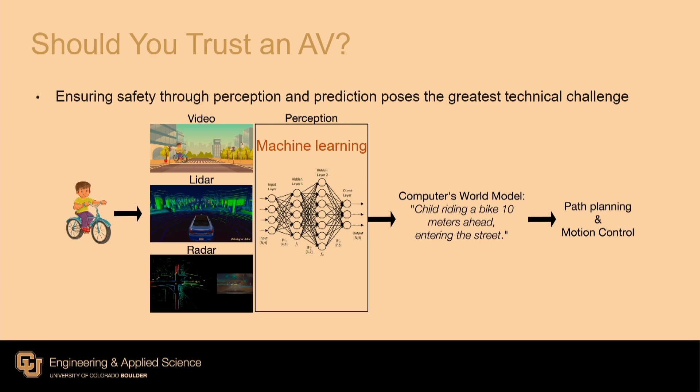My own research lies here, on path planning and motion control. And the good news is we can provide formal guarantees. We can provide a mathematical guarantee that the motion planning and the path planning is correct as long as the computer's model is correct. So that's the assumption, right?

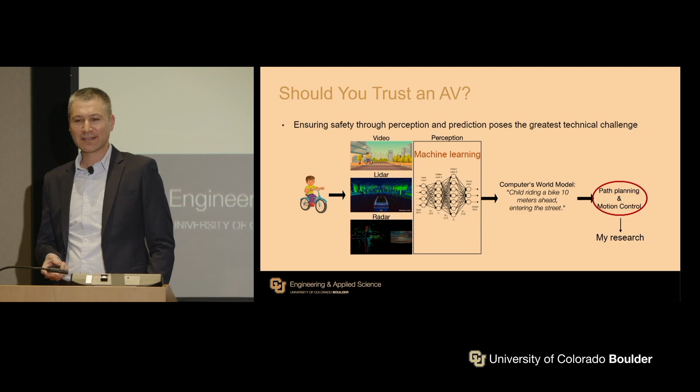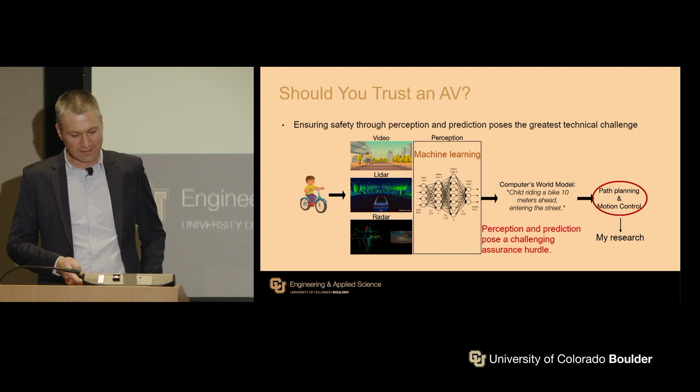So, what can go wrong? Unfortunately, this model is built completely based on seen data, the data that the car has observed so far, and this is the problem that we are facing. Let me dive into this more. Machine learning techniques do very well on patterns that they have encountered so far. They do great. But the problem is those scenarios that they have not encountered.

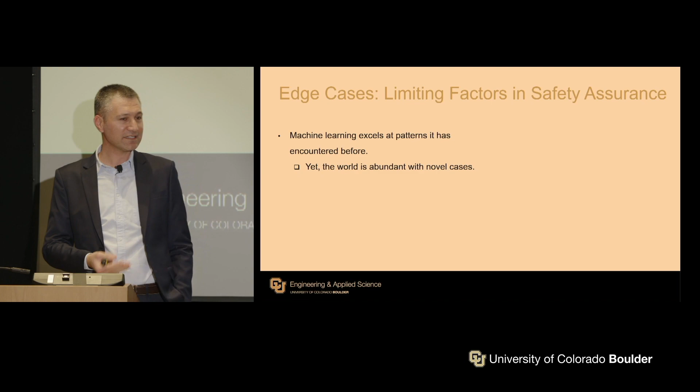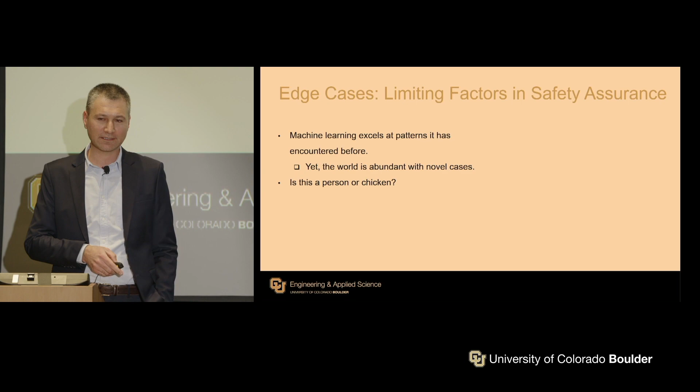And guess what? There is tons of novelty in the world. You go to different countries, you see things that you haven't seen in your life, right? And in fact, 10 years from now, you're going to see things which you never thought you'd see in your life. So let me ask this question. I put a picture here, and raise your hand if you think that picture represents a chicken. Raise your hand if you think it's a chicken.

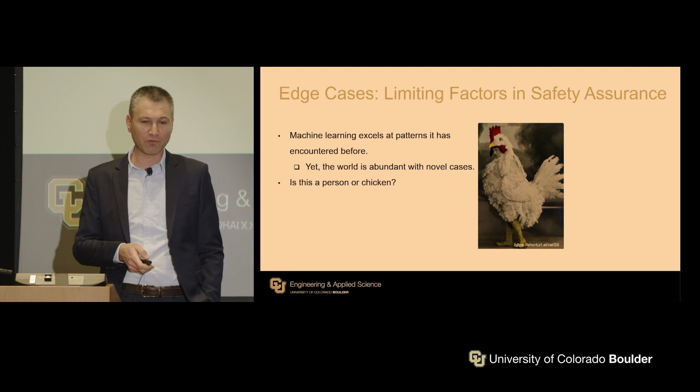Now let's put this picture into one of the state-of-the-art image processing algorithms, which is behind the perception engine in the autonomous vehicle, which is supposed to build the world around the vehicle. And the answer is 99% this is not a person. And this is the problem we are facing. This is the main reason we cannot deploy self-driving cars.

These are called edge cases, or corner cases. These are unforeseen surprises. They won't surface during testing, and this is the problem. Let's say your self-driving car is able to do well in 98% or even 99% of scenarios. Is that 1% really the bottleneck? And the answer is yes.

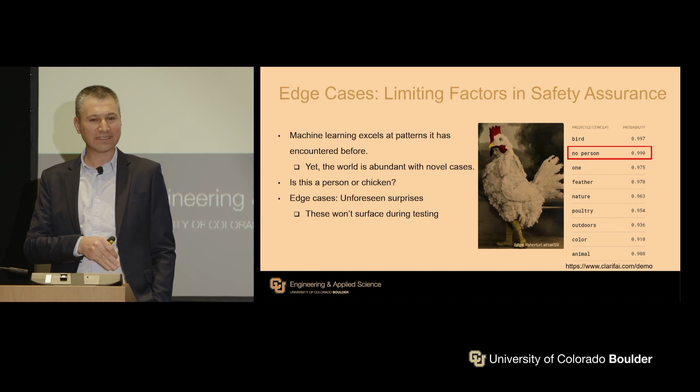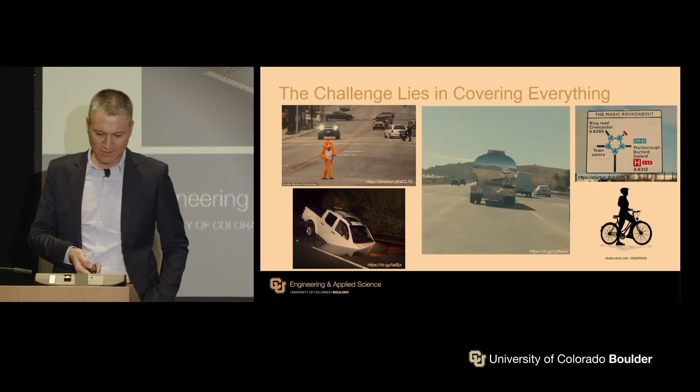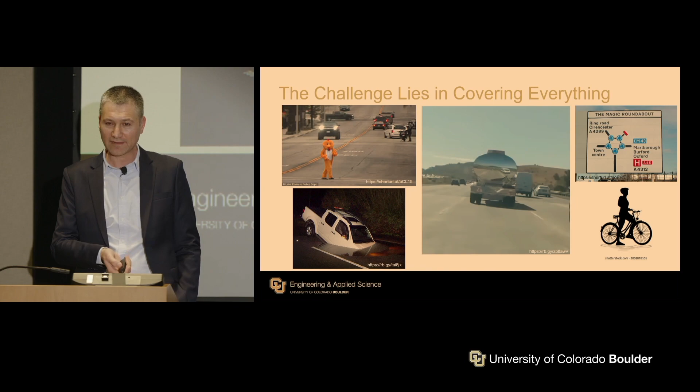Maybe as humans, we have some insight, right? Or here, as you can see, there is a reflection of another car in the truck which is driving in front of you. And also, your self-driving car should be able to navigate very complex traffic situations in different countries. Here you can see this magic roundabout, right?

And of course, it should be able to understand, for example, here there is a person. Is this person standing next to the bike, or is this person biking? And you might say, does this matter? Of course it matters. Why is that? Because if the person is biking, you have to predict the speed of the person, right?

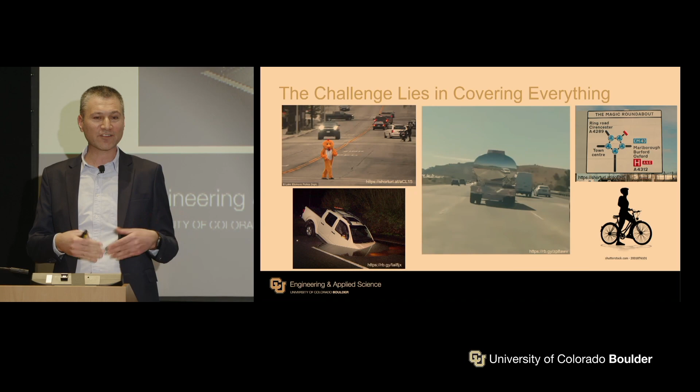If it's standing, then these are two totally different assumptions, and that's going to affect the deployment of the self-driving car and the navigation. So, okay, what is the current practice? Public road testing, right? If you go to San Francisco, you've seen a lot of them, right?

What are the pros? Of course, they're very efficient in identifying straightforward cases, right? And most of them have been driven under sunny skies: Arizona, Las Vegas, San Francisco, right? And you know why. So what is the con? First of all, they're very costly.

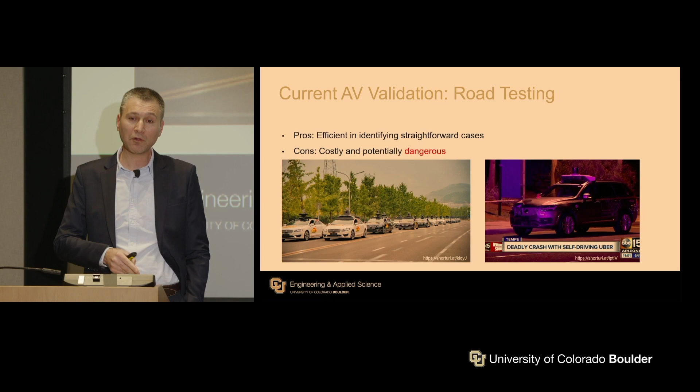This is a self-driving car company in China. They're actually trying to test on a designated lane, right? And at the same time, they can be dangerous. This is the Uber car crash that happened in Arizona in 2018. A pedestrian died. After this incident, Uber actually shut down the whole autonomy division. One incident, and they shut it down, right? Because it affected people's perception.

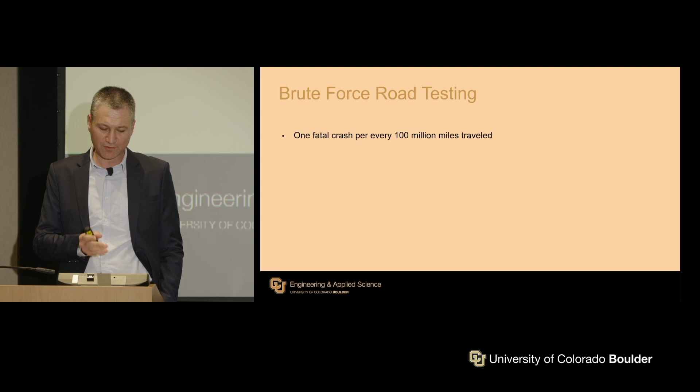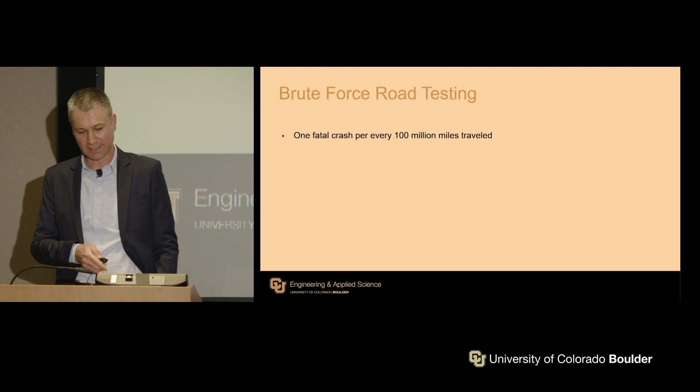And I'm going to tell you, brute force road testing doesn't work. The reason for that is, let's look at the statistics we have. We have one fatal crash for every 100 million miles in the US. That includes drunk drivers, right? One fatal crash in every 100 million miles. So let's say we want a better statistical guarantee, and we test at a rate of 3 to 10 times longer than this, one fatal crash per 100 million miles.

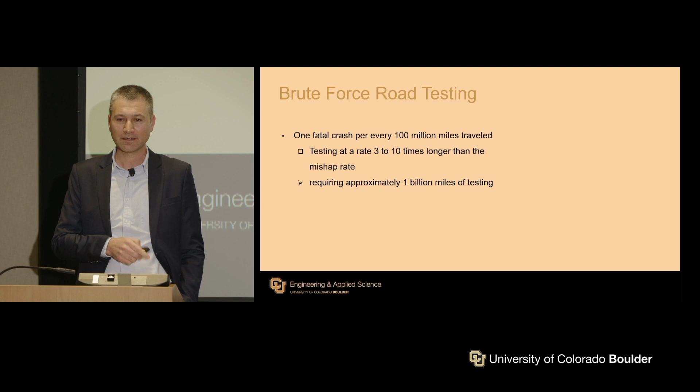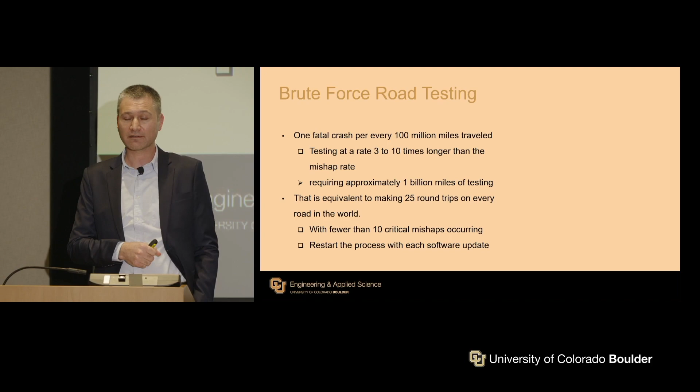That requires approximately 1 billion miles of testing, which means 25 round trips on every paved road in the world. That's the amount of testing you have to do. And you're only allowed to have at most 10 fatal crashes. This is not the end of the story.

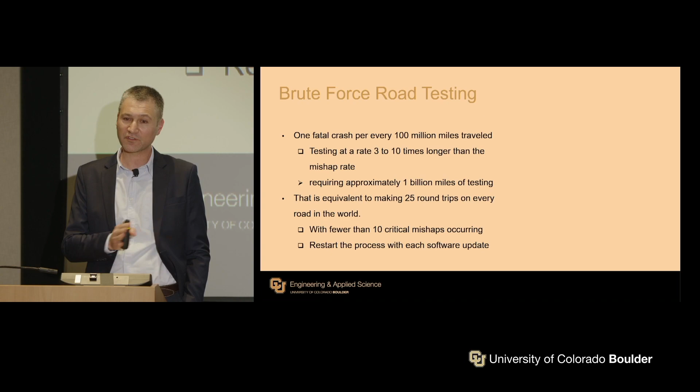Guess what? You update your software. You update the geometry of your car, a sedan becomes an SUV. You change the sensor camera. You have to repeat the test from scratch. The result of the previous test does not carry over if you make some changes in your system. So you see, brute force testing is not practical.

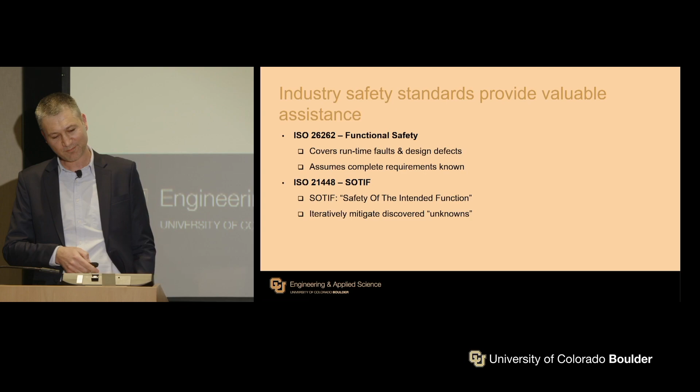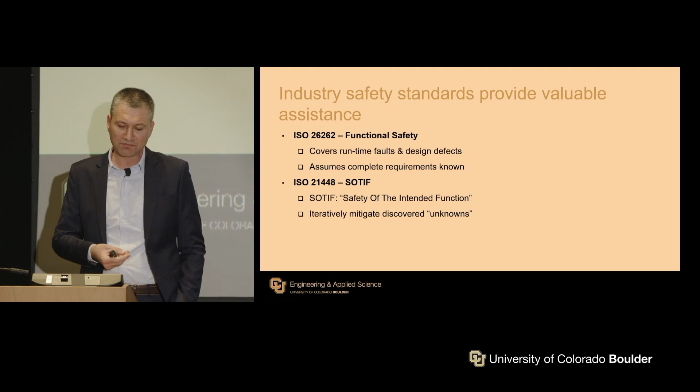The good news is the industry is actually working on some standards for autonomous vehicles. These are some of them on functional safety, which have existed for 10 years already. And there's a new one developed in the European Union called SOTIF, Safety of the Intended Functionality, which tries to iteratively mitigate discovered unknowns.

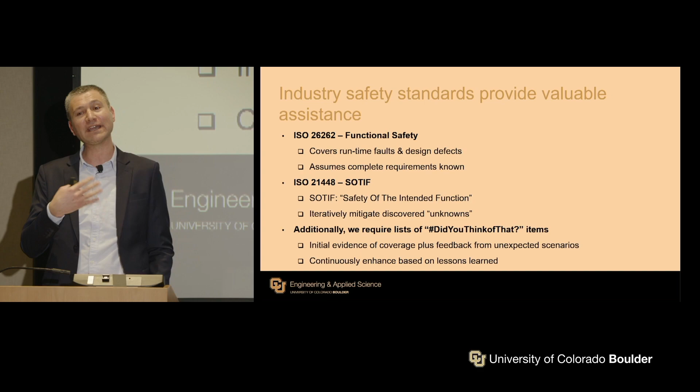Additionally, we also need to have a list of "did you think about that," right? These are the unknowns we have to think about, the corner cases, the edge cases, which might happen in reality that we have not thought about. So we need to continuously enhance based on lessons learned, and we need feedback from unexpected scenarios which might happen.

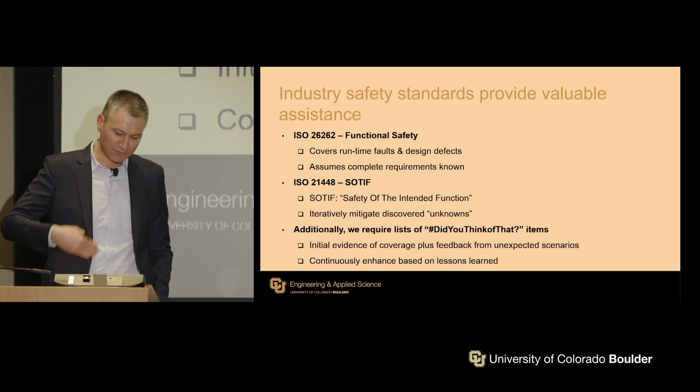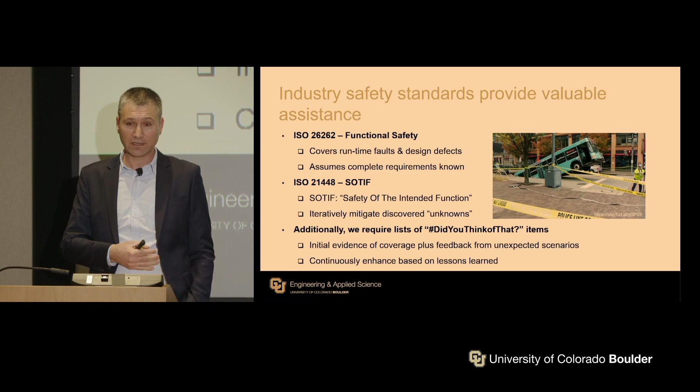And this actually happened in Pittsburgh, right? This is a bus. In this case, the driver decided in real time that the best option was to let the passengers out of the bus. Now imagine it was a self-driving bus.

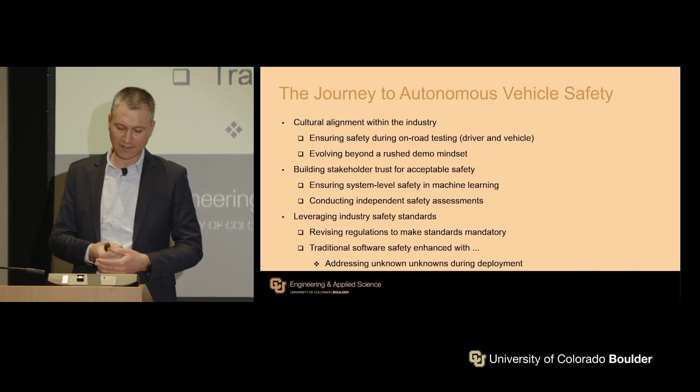Okay, what is the journey to autonomous vehicle safety? We need to change the culture within the industry. And we need to provide safety during on-road testing. For example, with the Uber crash, they shut down the whole division, right? If we cannot provide safety during testing, that is going to impact and delay the whole process for several years.

We need to evolve beyond a rush demo mentality, which is the case now in the US. The Europeans are a bit more conservative in mindset. They're taking their time, they're following the standards. But this demo mindset also makes sense, because they need to secure the next phase of funding, right? They need to deploy something.

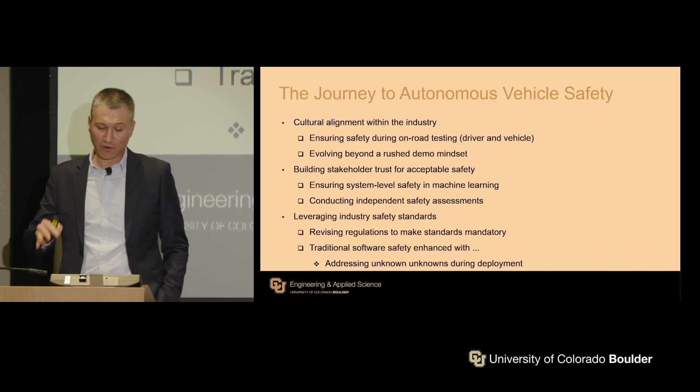We also need to build stakeholder trust for acceptable safety. As you recall, I said we are using machine learning techniques for perception, so we need system-level safety for that. And we need independent safety assessment for self-driving cars. Many industries do have independent safety assessment: the FAA, the petroleum industry, many industries. The car industry is one of the few which does not.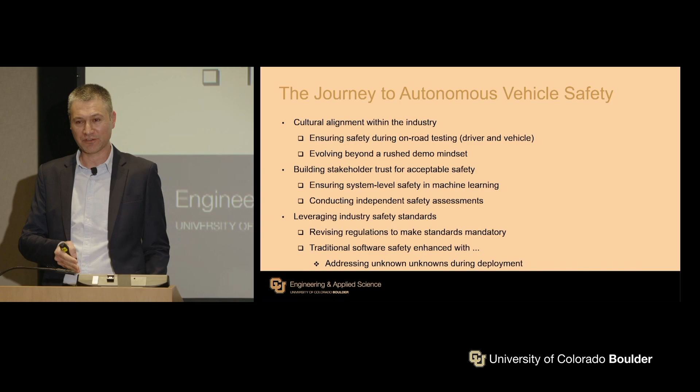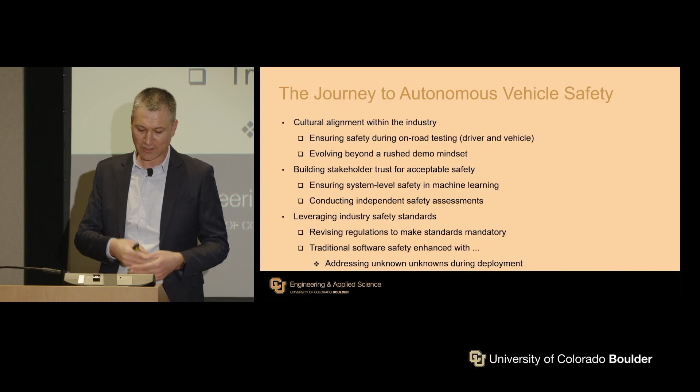We also need to leverage industry safety standards. We need to revise regulations and maybe make them mandatory, right? It's very strange to hear that many self-driving car companies in the US are fighting hard to not have any standards for autonomous vehicles. And of course, we need to employ traditional software safety, enhanced by addressing the unknown unknowns during deployment, those corner cases which might happen.